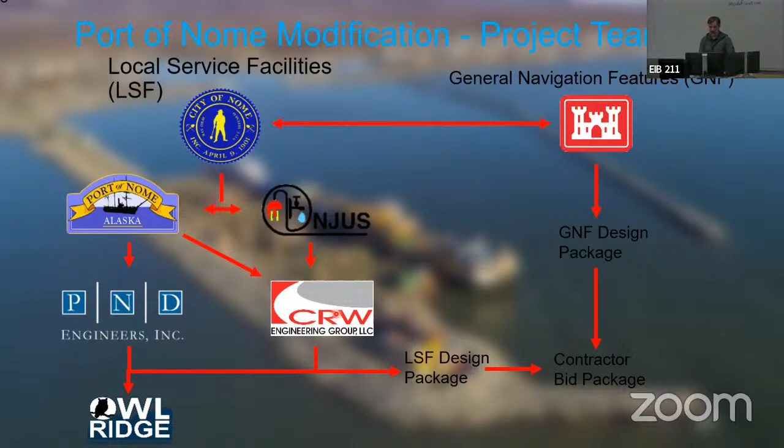So from the beginning of this project, we set out with a few objectives. This is to serve as the United States' only deep water port in the Arctic, to provide and continue a critical link with the Bering Straits communities and the rest of Alaska that are served by the port. The existing port facilities, as you can see here, are overcrowded, and this was meant to serve the overcrowding in the existing facilities that continue to grow every year.

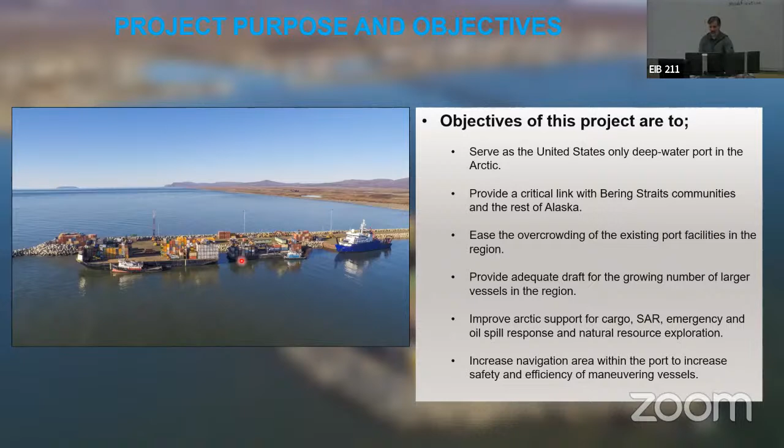In addition to growth, they're also seeing larger and deeper draft vessels, and recognizing that the facility needed a deeper draft port. And then some other things like improving support for search and rescue, access to natural resources that are in the area, and also just improving the overall efficiency of the existing facilities.

So a little bit about how we got to where we were at. So in 2020, the Army Corps of Engineers issued the Port of Nome Modification Feasibility Study. This was an update and a rework to an earlier study from 2016 that did not consider the Water Resources Development Act, the WRDA, in its justification of why this port should be expanded and modified.

So the Water Resources Development Act allows you to justify projects on different bases than just net economic development, like the 2016 report looked at. It allowed things to be considered like community viability, public health and safety, subsistence resources, and cultural significance. And so the 2020 report was able to justify the project based on an updated net economic development, as well as the critical support that the Port of Nome provides to many surrounding communities in the Bering Straits region.

After 2020, the design agreement for this was executed in June of 2021. We've been at work on designing the project with the Corps of Engineers and the Port of Nome since then. The 2020 report selected alternative 8B for construction. There were, I think, 10 to 12 alternatives that were considered in the original 2016 study. That was winnowed down to 7, but they kept the same names. 8B was the one that's selected. And I'll give you guys an overview of that here shortly.

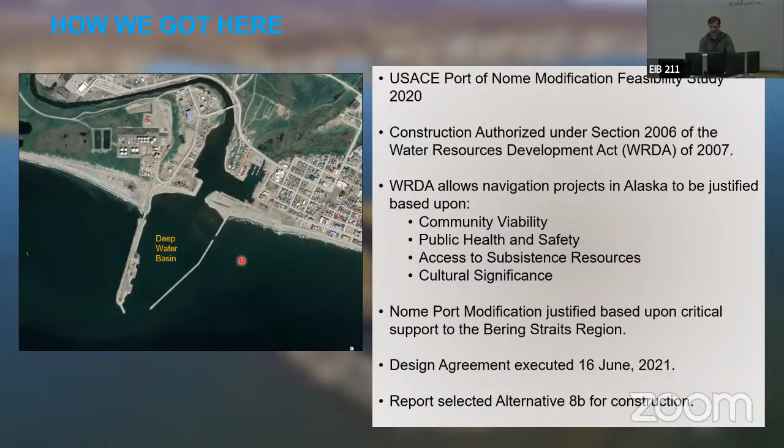So as far as where we're at right now, we have all the permits in place. The design is at 100%, and we are still putting the finishing touches on all the bid packages and everything. That should hit the streets sometime in late October or early November here. The port's just sitting there with the 3 current docks waiting to be expanded.

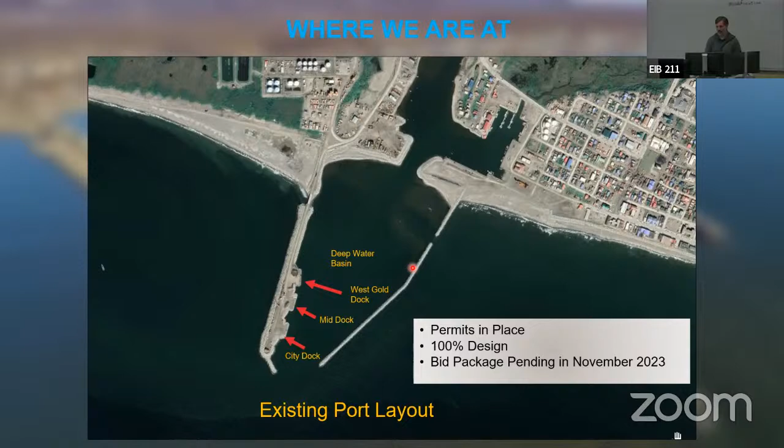So where this project is headed, as I mentioned, the Corps of Engineers study selected alternative 8B, which is what's shown up here on the screen. But 8B is a relatively large project, even broken into the 3 phases. This presentation is mainly going to focus on phase 1 of the design, since that's the design work that was done, but I'll give you a brief overview of the entire project. Phase 1, as I mentioned, is going to bid in 2023, here shortly. Phase 2 is mostly dredge work, and is expected to be designed in the next year here and be awarded in 2025, with phase 3 designed in the next 2-ish years and awarded for construction in approximately 2027.

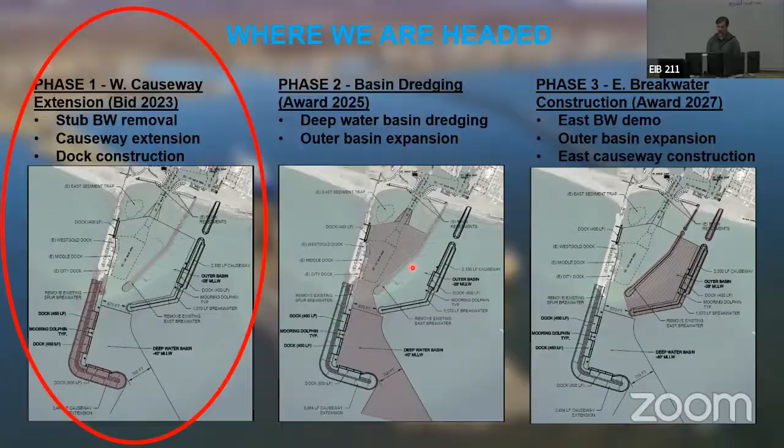Phase 1 has been designed to provide an additional 3,500 feet. The existing facility stops about here where the cursor is at. It will extend the Armorstone Causeway approximately 3,500 feet, provide an additional about 3,500 feet of roadway access along the entire causeway, another 2,000 feet of dock facility and mooring facility, and approximately 10 acres of storage facility between the roadway and the face of the dock.

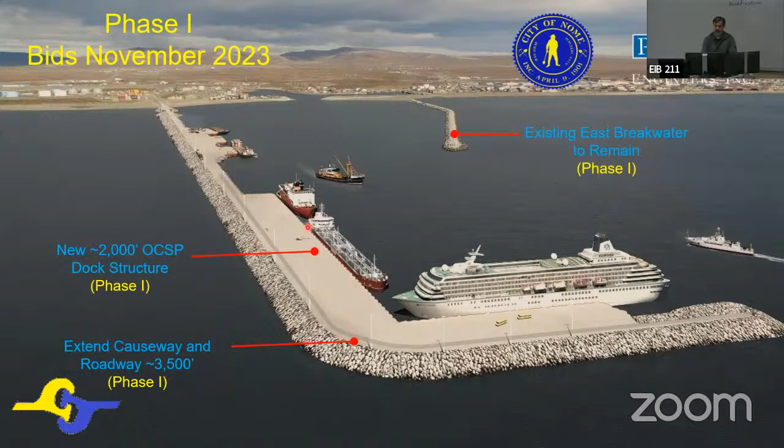When phase 1 is complete, the far south end, this is the south end where the cruise ship is here, will be in about 42 feet of water. And then it tapers back up as you move closer to shore. However, phase 2 is entirely dredge work. Phase 2 will extend the minus 40-foot basin all the way along the new 2,000 feet of dock. And additionally, it will dredge the existing facilities in here where the 3 existing docks are to minus 28.

That'll allow Nome to be able to berth a much larger class of vessel than they currently berth, in addition to having just a tremendously expanded amount of dock space, and it will expand the capabilities of the existing facility somewhat by giving them an additional 6 feet of draft to utilize those facilities as well. What's their current draft? The current draft at the existing facilities here is -22. So they'll get an additional 6 feet of draft.

So phase 3, as I mentioned, is not currently in design, but it was the recommended plan to be implemented by the Corps of Engineers report in 2020. I'm going to move back one slide here. There's an existing east breakwater here. Phase 3 would remove that breakwater that was approximately here, extend it out slightly, and turn the north-south section, this section here, into a causeway with roadway access that would allow for the construction of 2 additional dock facilities for Nome. In addition, there would have to be a new breach bridge that allows for fish passage and water passage along the shore, in conjunction with the existing breach bridge that's on the existing causeway.

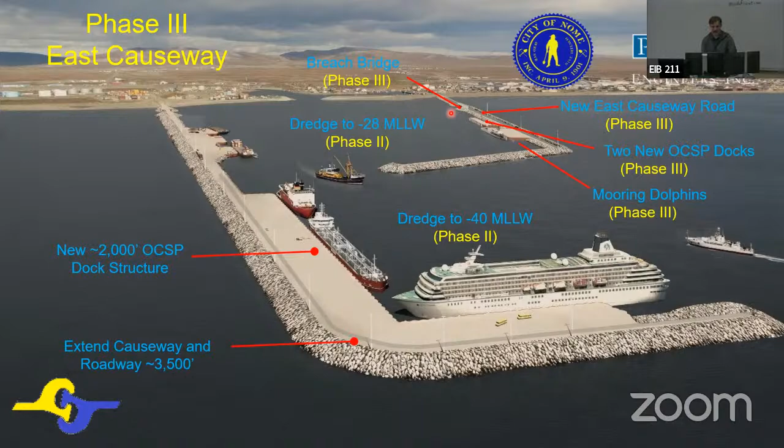So with that general overview of the project, I'll go into some of the design details for the specifics for the causeway and dock structures. So the Army Corps of Engineers, as I said, took the lead on the design of all of the armor stone for the project.

The new causeway armor stone will be very similar in design to the existing causeway. However, the rock design has been optimized to use slightly smaller stones than what they used in the original design. The outer layer A1 rock on both sides will be approximately 18-ton average rock size with a 25.5 or 22.5 ton stone for the maximum rock size. The under layer that goes underneath that, the B-rock, would be an average of about 1.85 tons.

And the whole causeway will provide a 30-foot wide roadway access to the dock facilities with a relatively wide shoulder to place utilities and lighting, things like that, and provide drainage as well.

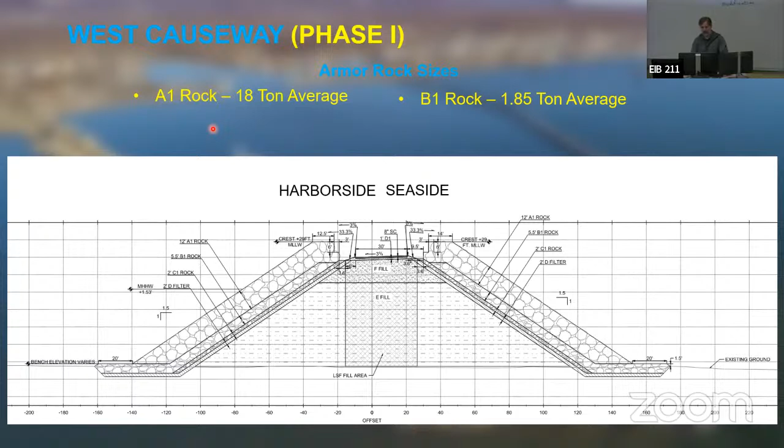What's the closest source for getting that stone? Cape Nome Jetty is about 12 miles east, and that is where all of the current stone for the existing causeway came from. And the Corps can't specify that the new rock will come from there, but that's the likely source that everyone is going to go after for it. It's too close and it's too high quality to be competitive anywhere else.

What's the durability on the rock itself? It's very high quality rock. I don't have any specifics off the top of my head, but it's really high quality. The stuff that is in place has not suffered any degradation, and it meets all of the Corps' specifications for their rock durability.

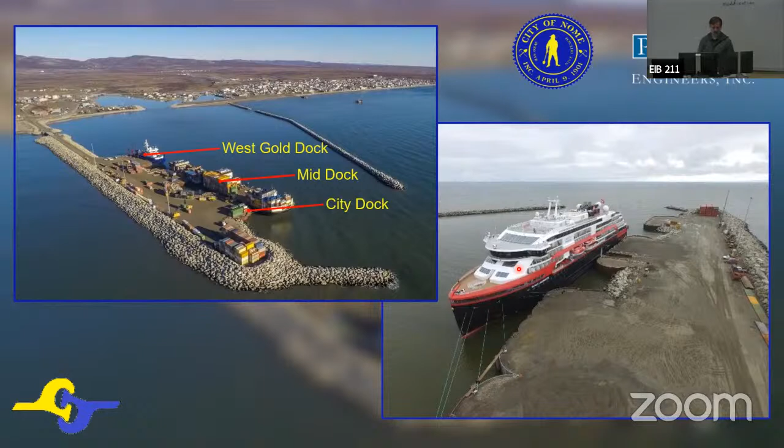So the open cell sheet pile design is constructed of flat web PS31 or PS27.5 sheets. You can see those down here. It's just a knuckled flat web sheet. The face sheets are laid out in a circular arc. In the case of Nome, it's a 34.5 foot radius. And they're anchored into the structural fill in the back with PS27.5 sheets, which are just slightly thinner sheets, same knuckles, just a little less steel.

And connected at each point by a Y pile. In the case of Nome, we have an XY pile that will be connecting these just for a little bit of extra redundancy. But they connect at each of these points and are anchored back into the ground.

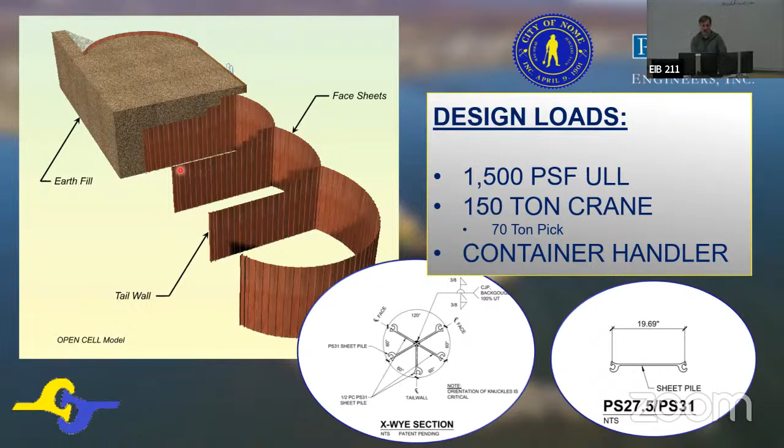The city had wanted to use pavement for quite a while during the design, and after Typhoon Merbok, they had lost a lot of pavement along the roadway along Front Street, and decided against it, mainly because of the ease of repairability. And no, it's not easy to get pavement equipment up there, particularly the thickness of pavement that would be needed in a port facility that's going to be carrying around large cranes and container handlers and things like that.

So we actually ended up with an interesting compromise on this, adding a stabilization admixture to the surfacing course. Typically used as a dust palliative, but it's also been used on several Arctic road runways. It helps prevent rutting. It promotes water drain off on the surface, and the runways love it because it minimizes the foreign object debris on the runways. The current facilities are just gravel, and in real wet conditions, they can get kind of muddy and messy. And this will hopefully alleviate a lot of that concern and give them a similar functionality to pavement, but something that can be easily reworked and easily reapplied, unlike the thick pavement that would have been needed at this facility.

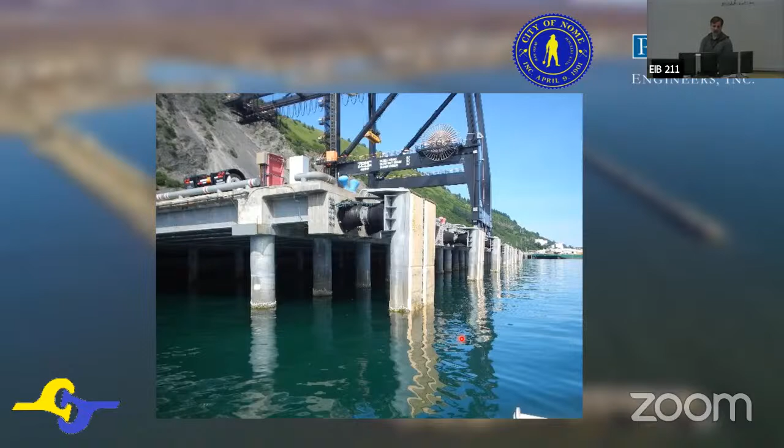The existing 3 structures that are in the inner harbor utilize a system. This is from, I think, City Dock, yes. It has a pipe pile that's driven into the ground and attached to the Y pile. And in the case of the new facility, it will be attached to the face beam with a rubber donut style fender on the front. So this will allow for like 90% of what is expected to come into Nome. So most of their day-to-day operations will be able to berth and utilize this.

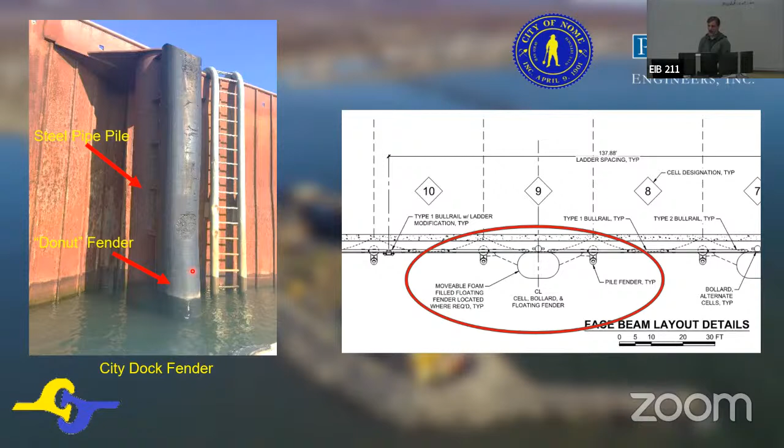However, when they do get those larger vessels that need to come in, we added a foam-filled floating fender that attaches to the steel pile. This is a similar design on a different structure, but attaches to the steel pile. And allows the vessels to release their energy up against there and not damage the structure or the vessel.

And it can also be easily removed in the winter time when the ice clogs the port and they're not needed. Or if there's a big storm coming in, they can easily release these, pull back on shore so they don't get yanked on the piles or destroy themselves. So it gives them a lot of versatility and something that's relatively easy to deploy and remove. And it didn't have to be gargantuan to resist all the ice forces and also be compliant enough for incoming vessels.

So, yeah, that's basically all I have. I do have one short little video if I can get it to play. But you can see it's a pretty exciting prospect for Nome and Alaska in general. It's going to be a huge boost for the economy for a couple of years while they're constructing this. I do have a rendering of the dock that was done around the 65% design level. So it has a few items in there that aren't included on the new design, a few minor changes, but it gives you a pretty good idea, an overview of the existing facilities and the expansion.

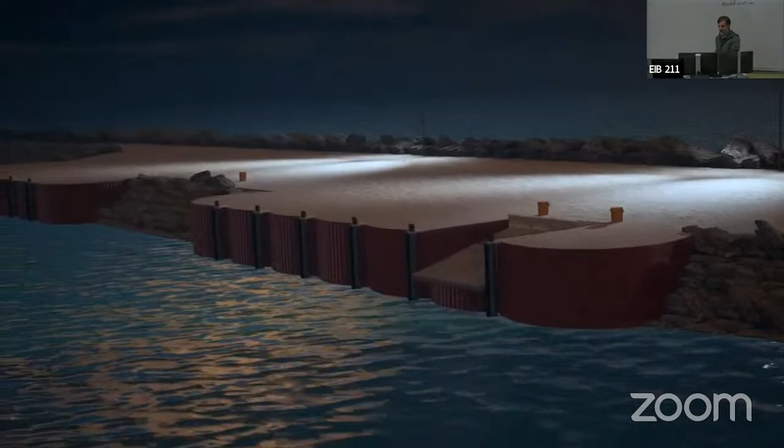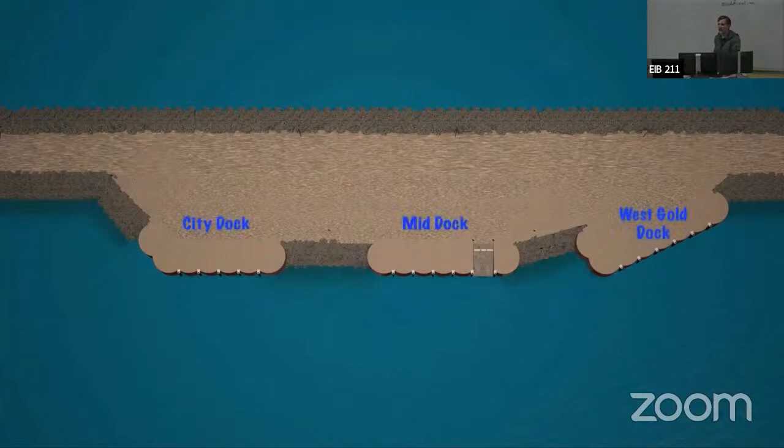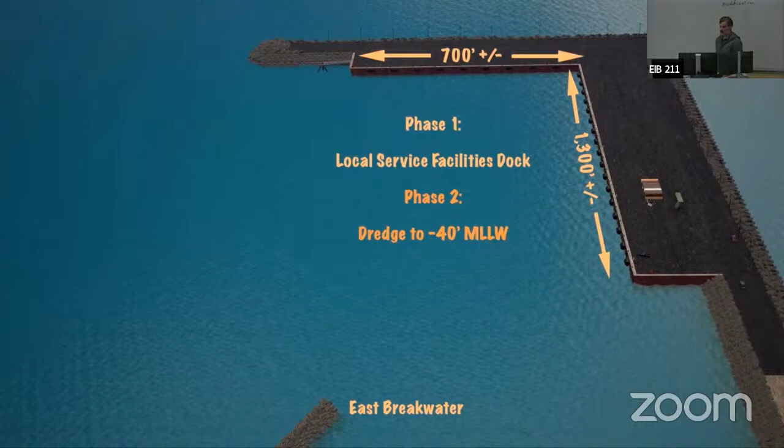So those are the three existing facilities. Mid-dock has a ramp for loading and unloading small barges. And the new facility, another 2,000 feet of dock, 40-foot draft. Just to give you an idea of the scale compared to what they currently have.

The original designs had a mooring dolphin out at the end, but we ended up encapsulating that in the cells and just putting an onshore bollard there. And with that, I will take any questions. Awesome. What is all that estimated to cost for construction? So the last estimates that can be shared publicly were around 600 million for all three phases.

Couple of questions. You're talking quite a bit of material, quite a bit of dredge work and quite a bit of infrastructure that's going to be needed for this. What other port is it designed to be competing against? And where else has your design been used?

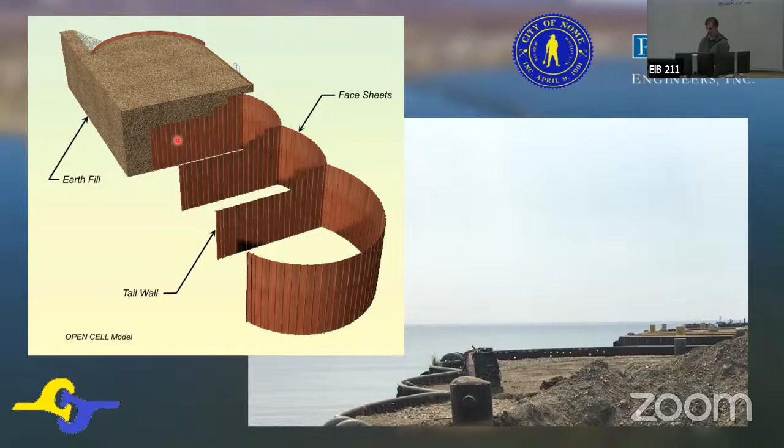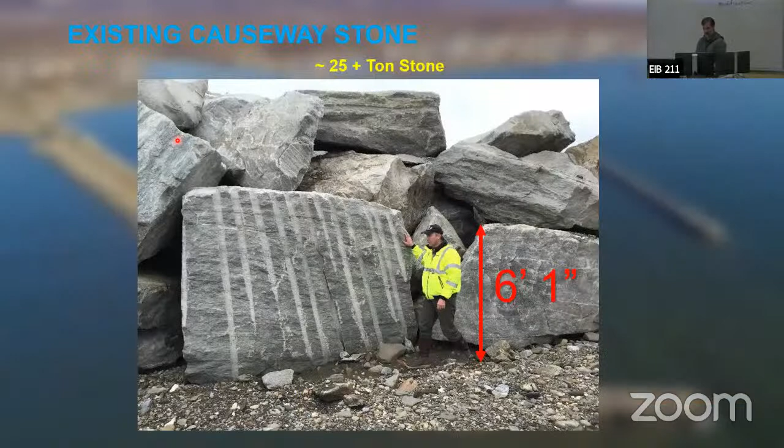Would you mind going back to your roadway cross section? You had some material call-outs that I was kind of curious about. I believe it was a black and white one, a little farther back. Oh, there we go. LSF fill. What are your fill materials in there on the interior?

Yeah, so LSF is actually the local service facilities. It's an acronym that the Corps of Engineers uses to describe the elements that are the city's responsibility to pay for and maintain. And GNF is the general navigation features, which are the Corps' responsibility to design, maintain, and construct. So this came directly off of the design drawing, so we had to signify that on here. Probably could have cleared it up a little bit for the presentation.

What's the primary source of funds? It's all federally funded. Well, the entire project is federally funded for the causeway. I guess I'll get into that a little bit. The city of Nome will ultimately end up paying 10% of the general navigation features, which is the armor stone causeway, amortized over 30 years. The city of Nome is on the hook to pay for 100% of all of the local service facilities. So all of the dock structures that we went over will be paid for by the city of Nome.

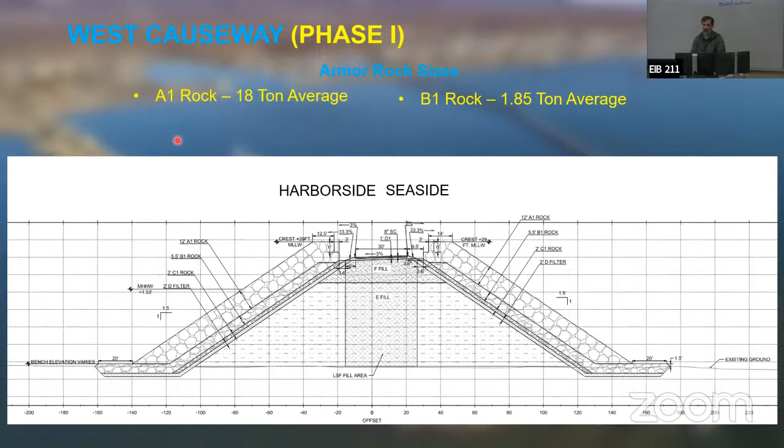What were the other alternatives? You said there was 8F; what were some of the other ones that they dismissed? So all of the other alternatives that they considered were just rearrangements of similar features. Yeah, so instead of having the L come all the way out to minus 40, they had another one where the L came out to like minus 28 or something, and then dredging. And this was the one that ended up coming out on top based on all the criteria they were using. There was no other real alternative as far as not building an armor stone causeway. You could have done the docks differently, but it was just different configurations of the armor stone, essentially.

Are there fuel unloading features that get extended, going both ways, I assume, to deliver fuel and receive fuel? Yes. That's one of the current issues right now, that the fuel vessels aren't able to actually berth at the port because they draft too much. So for some of those vessels, they end up having to lighter fuel in and out, which is problematic, as you can understand. Yeah, it's expensive. It's also problematic because you have to have all the environmental protocols if you have a spill or whatnot. And Nome relies a lot on fuel, so it's something that has to be done continuously.